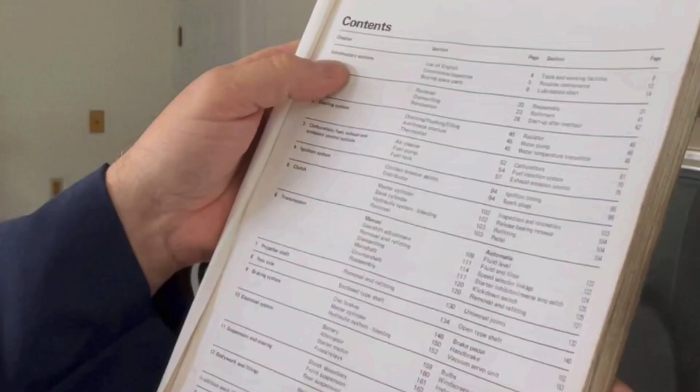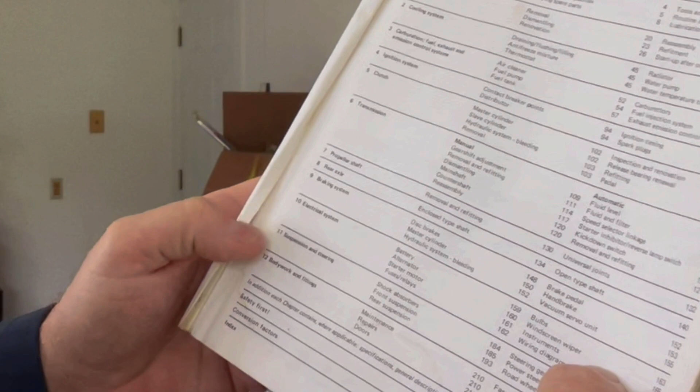So let me get to, here's all the lubrication points and all of this kind of stuff. If I look at the chapters, we're going to kind of follow this as we bring her back to life, which means we're going to talk about the engine, the cooling system, carburation, ignition system, clutch - don't have one of those - transmission, I do have one of those, prop shaft, rear axle, braking system, electrical system, suspension and steering, bodyworks, and fittings. We have 12 chapters to get through before we get her back on the road.

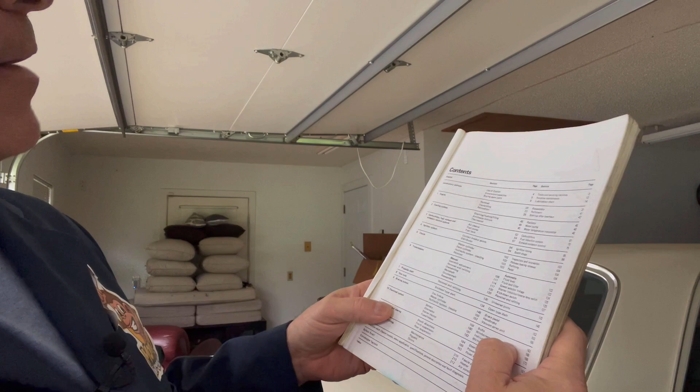Some of these are going to be easy, some of these are not, which is going to make this build super, super fun. Hey, I do want to mention, I got something in the mail.

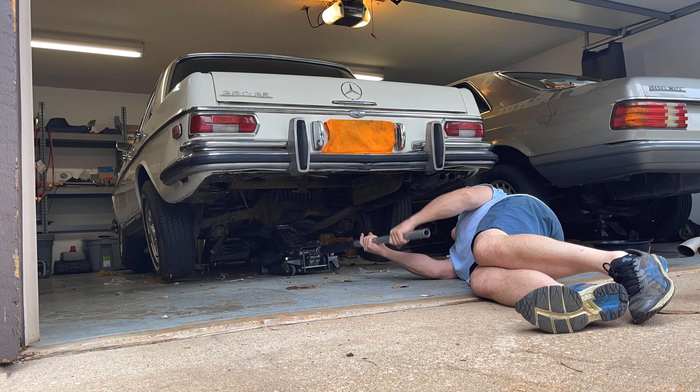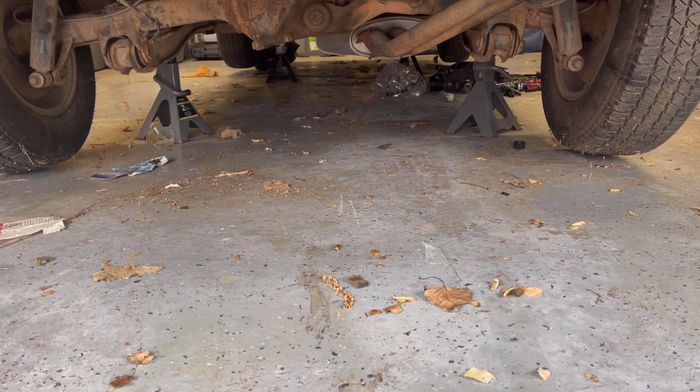Just to let you know how long the car has been sitting here - I've been at this house since mid-July, and this car has been sitting here the whole time, and I feel so guilty. Now I have to crawl under there and work on this stuff while that stuff's on the ground. Isn't that gross? I also want to show you this.

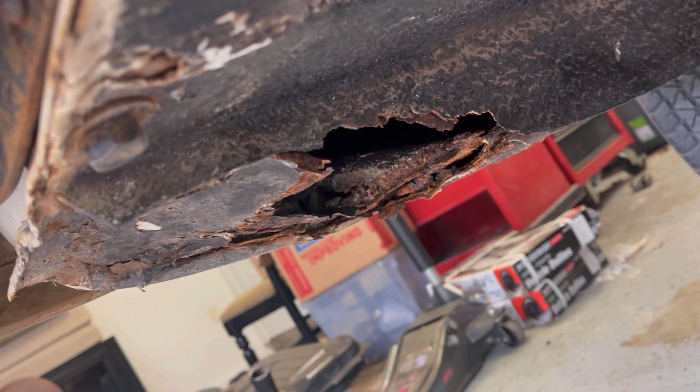Remember that video? We thought we had a perfect car till we saw that. Look at that rust - that's a car's worst enemy right there.

Okay, so we need to fix that. I remember when I did the video, somebody, I want to say from Saudi Arabia, said they knew a good parts source for that, and somewhere I could just get that bottom portion. I've lost that message and I can't find it. As I go through all my parts here, we're all going to have fun putting on. That's the problem.

So if anybody out there in YouTube land knows a good source for just the bottom part under here, is there a good source? I don't know, am I going to have to make it myself? I don't know. So let me know about that.

All right, we got her up on the jack stands. We're going down below - we haven't been here before. This is a first. It's kind of like spelunking. We don't know what we're going to find.

You got to make sure you say that word right - spelunking, spelunking, not the other word. Here we go, this is the first time to go underneath Janice, which kind of sounds dirty, but you have to do it to see what you're working with here. Well, that kind of sounds dirty too.

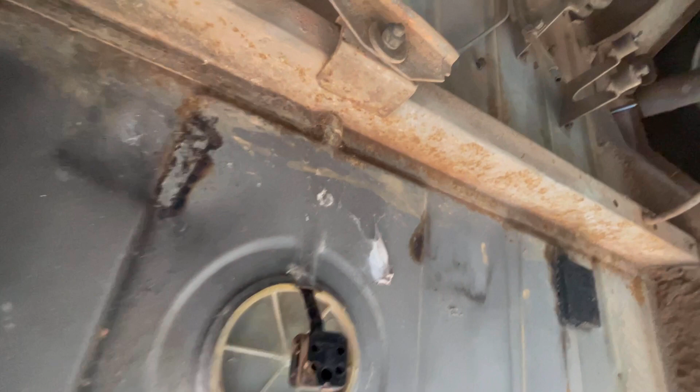Anyway, okay, so here is where the gas tank goes. I am nervous about taking this out because I know it's going to crack, I just know it's going to crack. This is the connection for the fuel sending unit to see how much gas you have. I'm not going to replace that just yet because it does move up and down when you move it.

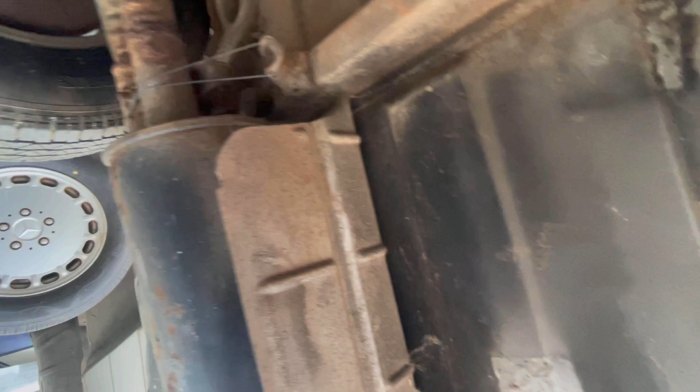Okay, let's see if we can get the exhaust over here. It looks okay, maybe some little pinholes. If I push it, we're not going to push it and make it break or anything like that. Okay, we have brake lines coming down through here, which is okay. These two things connect to your fuel tank.

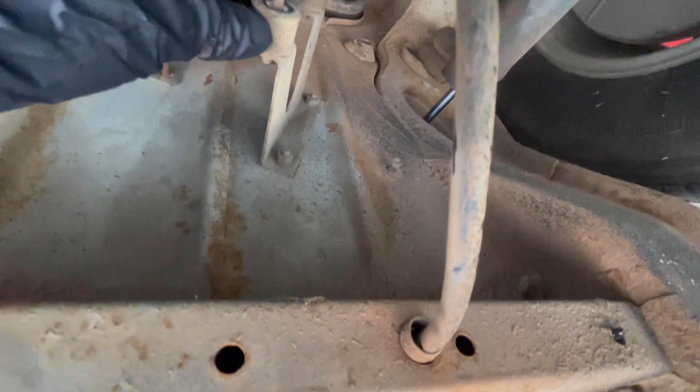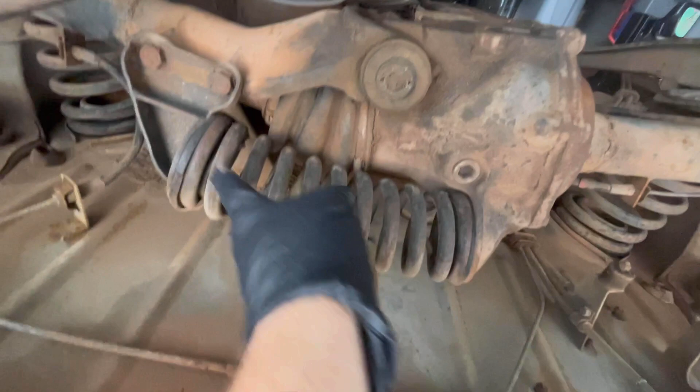This right here is where your fuel pump is housed and attaches to. Okay, you got your rear diff - we're all the way upside down now. Isn't this interesting how they do the rear suspension part of it right here? Isn't that nice? That's cool.

Okay, this is still kind of rubbery, that's good. Let's take a look at this - I do have new brake hoses so we're going to replace that. We're just looking for major issues. There's one shock, hasn't moved much in years and years. The other shock is right over there.

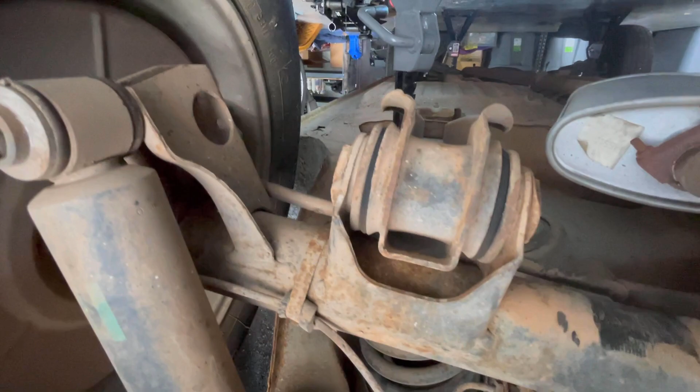Yeah, we're still upside down. Muffler has been replaced, that looks like a different unit, so that may be a little newer than the car. The bushings - I don't know how I need to do this, do I need to go back upside down? Maybe that's it, I don't know, we'll see. Okay, so there's the bushings.

Okay, we are going to replace the oil in the diff when the book tells us to, remember, because we're doing this all by the book. I have to go off my little creeper here because it's too tall and I can't get underneath the car. Okay, that's the creeper rolling way down the hill.

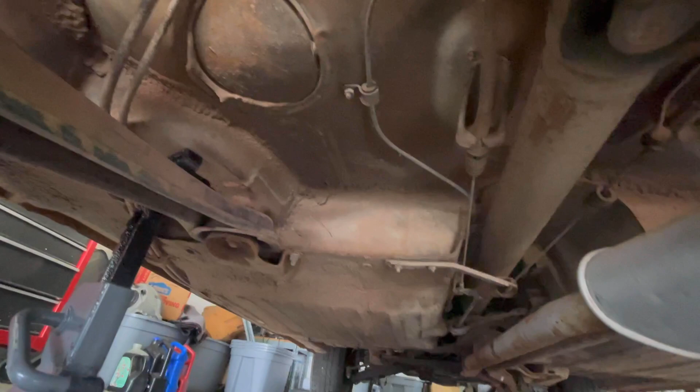Okay, now we're coming up on the muffler, everything okay? That looks okay. These lines coming down from here - I don't see a whole lot of rust or anything. I see some wasp dirt dauber homes right there. Quite understandable, remember the one that kind of attacked me when I first got her? Yep, okay, so this looks okay.

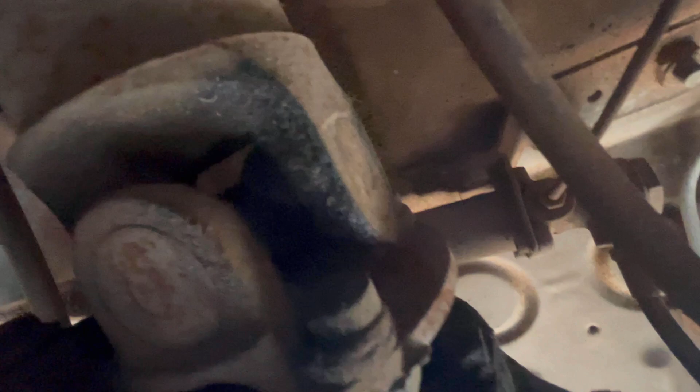Let's go under here, we're still spelunking. All right, drive shaft is right here. Okay, let me see if I can - we're going to go back up and around. And I'm sorry, where's my light? There we go, U-joints.

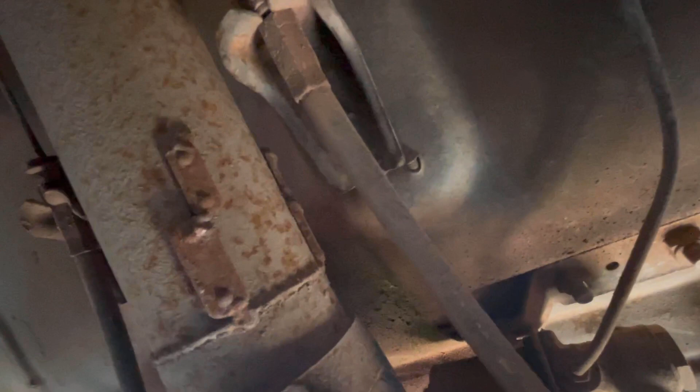Okay, experts, tell me what you think - kind of gunky, it is a little bit gunky. Okay, here's your emergency brake. I'm trying to give you enough room to kind of see everything. This is the spring for the emergency brake. Fuel line seems okay.

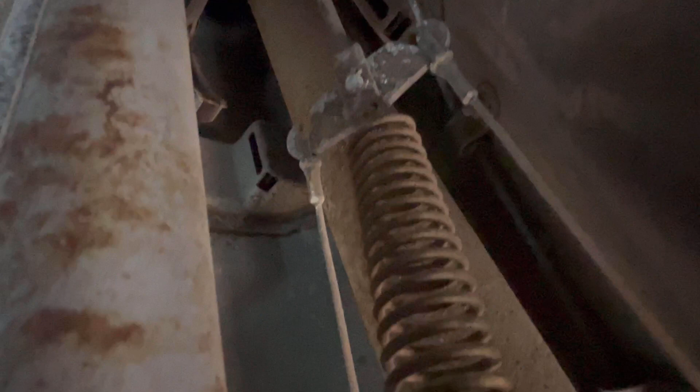Everything looks okay here, let's look at the exhaust - okay, a little rusty, I don't feel holes or see any holes. A spider, giant spider just ran up right over there. Right over there, okay, I don't want him to come down on me. So everything looks okay here.

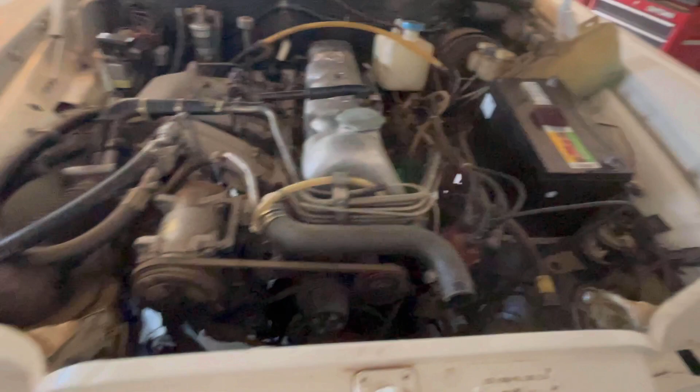Let's go underneath the engine and see what she looks like. Top of the engine you've seen, the bottom you have not, so let's go down there and check it out. Okay, that's gross.

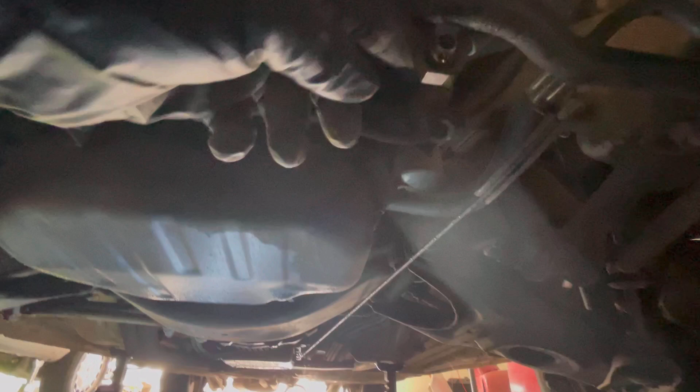Okay, I've already removed the radiator. We told you about that, which is fine. We've had it redone. This attaches to that, that attaches to that. We have new belts, not a problem. I have all new belts for this thing. I'm just kind of looking to feel.

It's one of your engine mounts right there. That's kind of cool how they do that. A little bit of shock absorber.

Major leaks. Well, this transmission cooler line, of course, is leaking, so that's not a big deal. Okay, I didn't jack up the car with this. Thank goodness, Mike. Yeah, we did not do that and ruin this oil pan like we did on Frida. This looks okay, there's no oil in here yet.

Don't know what this is. Just a little metal rod right there. Okay, let's see if we can go down a little further. All the experts kind of chime in. Look how long she's been here. Look at that, okay.

All the little bushings, these are kind of hard, so eventually those will have to get replaced.

I did work on the starter a little bit. Come here, light, let me show you. So when I first plugged in the battery, a huge puff of smoke came and went, and there were some wiring issues right here. So I kind of addressed this already. So now when I try to connect the battery, there's no fire, which is a step in the right direction.

Lower control arm looks good over here. Looks okay. Over there, let's get behind the transmission. We got something leaking right there. Let's see what's above it. And we have some transmission fluid leaking out of here.

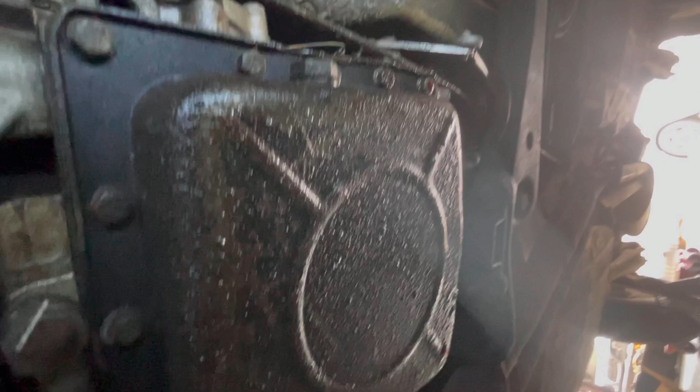We are changing all the fluids on this, of course. This is kind of wet. This is your tranny pan right there, and it looks like it's covered in stuff. So I'm worried about the rear main seal. With my luck, yeah, it'll need replacing because it's coming right out of here.

And in the newer cars, this is where you take the little nut out of the torque converter to drain it, right here, okay? But we do have, that's gross, lots of transmission fluid right there. Otherwise, as far as the body and everything, looks really fine.

Okay, what about this hose right here? Okay, that's okay, alright. This is leaking, here we go. We're turning around again. Here we go, what is this?

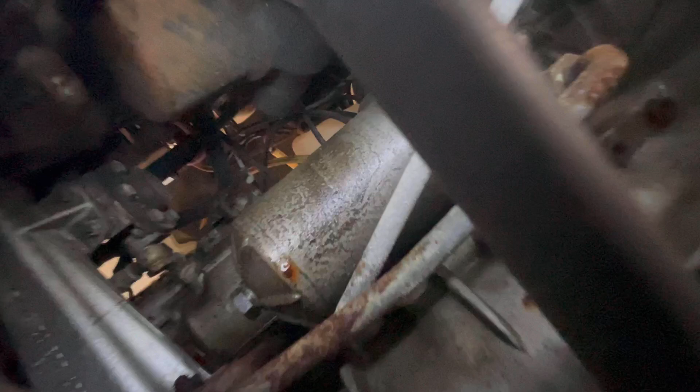Is that the oil filter down here? That's what it looks like. Wow, how much fun is that going to be to drain? It's just going to drain right on your face. I think that's the oil filter. I think so, okay. But up there it looks kind of dry.

Everything looks good. Tie rod. Ooh, yeah, these things are... Ooh. Okay, a little messy right there. Okay.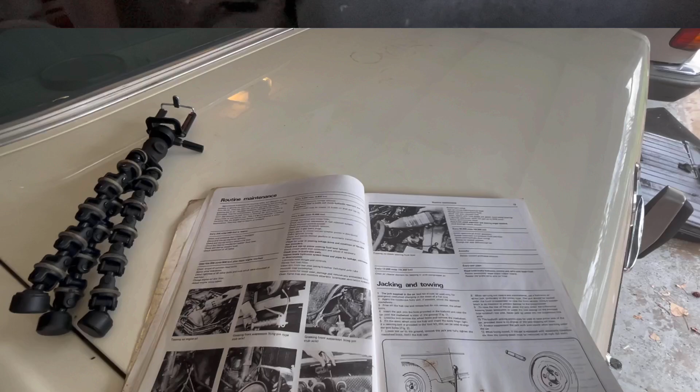Okay, let's do a little grease work, because grease is the word. Back with the Bible, yep, the 280 SE Bible. We're going to follow this. We're going to follow Haynes' infinite wisdom, and we're going to do a little greasing right now.

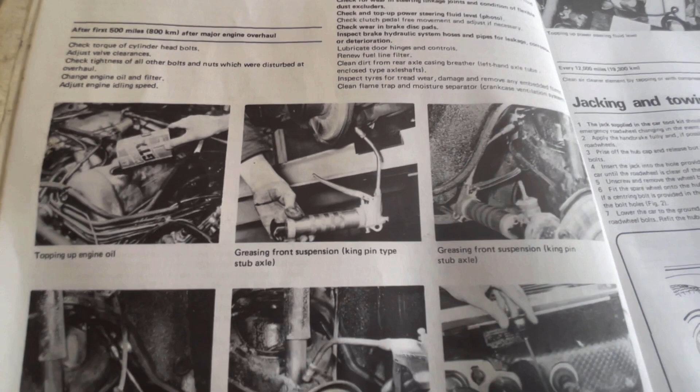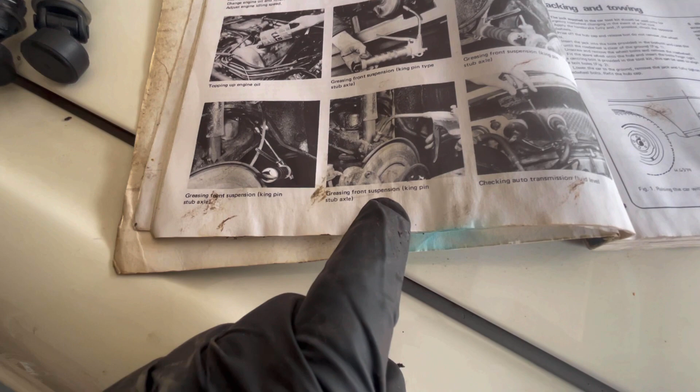They even give you directions. Okay, this is greasing the kingpin. We have the front suspension right here. Front suspension kingpin stub axle, greasing the front suspension kingpin stub axle there again. Checking the transmission fluid, we're not going to do that yet. But we're going to page 12, 13, 14, 15. Typical lubrication for a 280 SE. These are all the grease points right here.

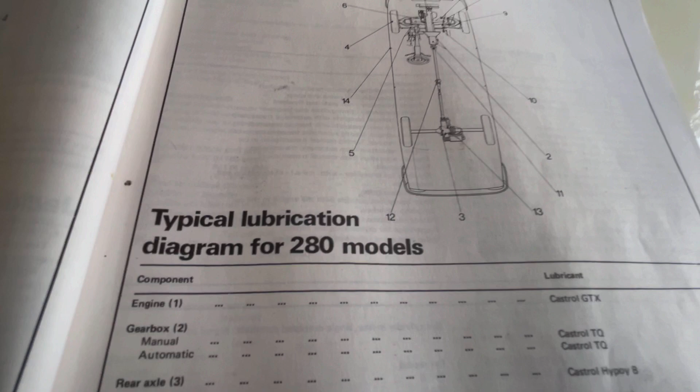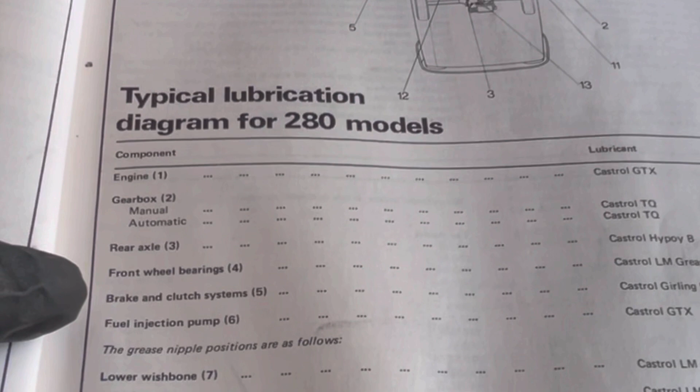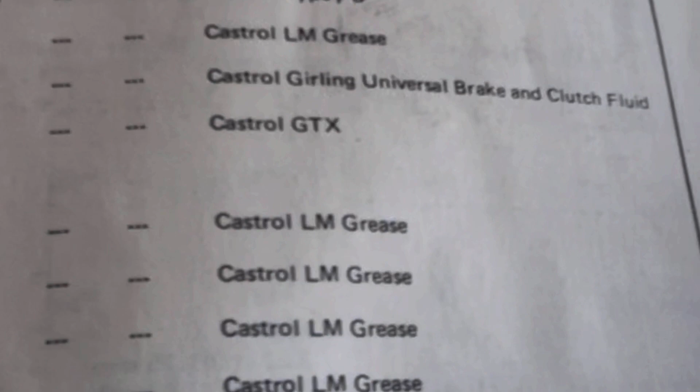So this is where we're going to begin, ladies and gentlemen, right here. Engine oil, gearbox eventually, rear axle eventually, front wheel bearings eventually, brake and clutch system eventually, lower wishbone, upper wishbone, steering knuckle, intermediate steering lever. Okay, these are all just Castrol LM grease, so it's regular old grease for these things. Central universal joint, unless it's maintenance free, rear axle, and then the door hinge. So we're going to do a little greasing right here. I'll show you some of this stuff, but not everything, because it's not all going to be so exciting.

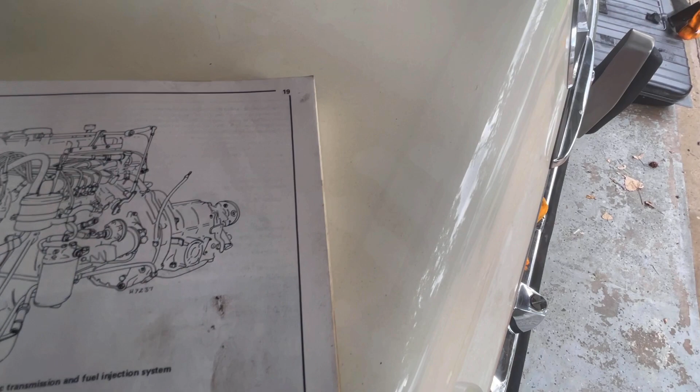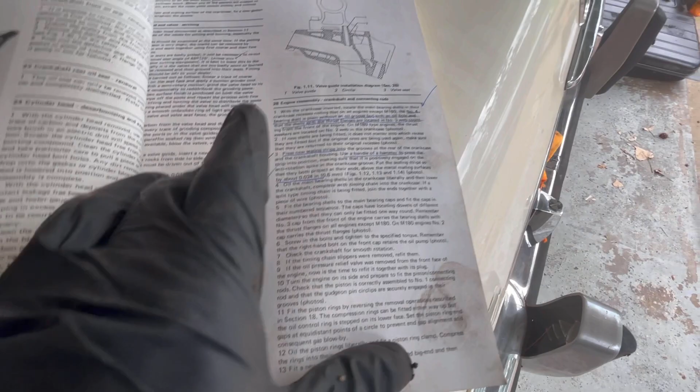This has me worried about the next part of the book. Look at this, they've been taking notes on measurements and all kinds of stuff. It gets worse toward the back here - notes, notations, and numbers, which tells me pistons and rings. See how that's underlined? If the bores are slightly worn out, more underlining. That's going to be in the next video - I just gave it away. But for now, we're going to focus on this.

If I zoom in, there is our first nipple that we're going to grease. We're going to clean it off a little bit and put some grease in there. Hopefully the old stuff comes out on the sides and the new stuff just goes right in. Got my little gun right here. Going to give it a pull or two and watch for the old stuff to come out and the new stuff to go in. Here we go, one, two, three. Look at that, beautiful. This is going to take a minute, we probably won't show you all of it. I'll let go - see, there you go. That's how you do it. Push it on, pull it off, grease, grease, grease, and you're good to go.

And just like that, Mike ran out. Yay, Mike just ran out of grease. So it's off to the store. Dadgummit, I just started with this thing and you're out already? We're back.

Now we're going to focus on this one right here. We have a nipple right there, and of course you clean these things off first. Attach this, give your grease gun a good squeeze or two, and it forces all the old stuff out. Okay, so there's that one. Let go, let go. And then we're going to do this one right here as well - squeeze it, squeeze it, squeeze it, and the old stuff comes out. Perfect, that's going to do it.